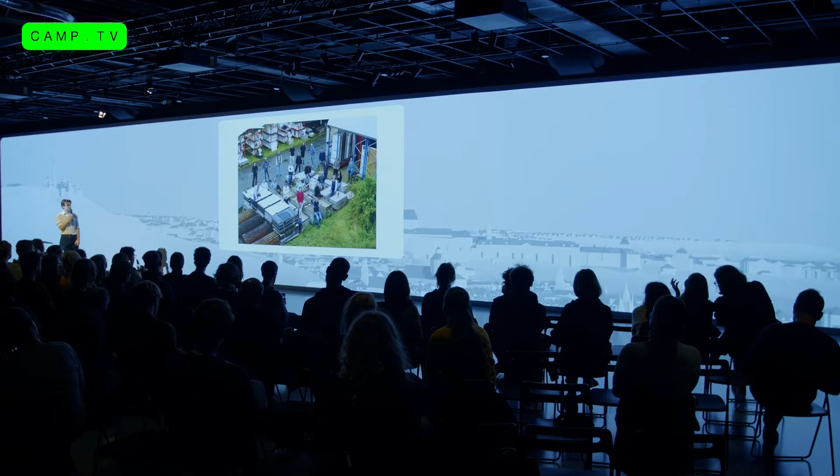So we're about 20 people on the side of Rotor Deconstruction and 13 people on the side of the non-profit. We are sharing a site, we are colleagues, but we're also two very distinct organizations, and we will talk about some of the activities of both organizations.

Actually, we're very thankful to be invited to this building because it's an excellent case to introduce our talk. We've had a very nice tour of the building. We learned it was built by Karel Prager, who seems to be one of the most prolific architects in Prague in the 60s, 70s, and 80s. And we also learned that after its construction, a couple of prolific architects had their studios here. So it seems quite an extraordinary place to have a center for architecture.

But actually, I want to talk about this type of building because it's clearly a local iteration of a type of building that most people in Europe will know, namely a 1960s, 70s celebration of steel, glass, concrete, and probably also aluminium in this case. Materials which you could consider as products of fossil fuel abundance. And an architecture that also very much celebrated these, at the time, modern materials as a way forward, as the announcing of a future.

Now, if you see buildings like these in urban centers, particularly of old European cities, it's probably worth asking yourself what buildings have had to make way for it, right? Because with this architecture, which carries a very optimistic view of the future, often came a very strong disavowal of the past, or maybe just simply a disinterest in the past. So I think in this case, a couple of apartment buildings have had to make way, but the apartment buildings here are quite big, so it might have been an entire city block, I'm not sure.

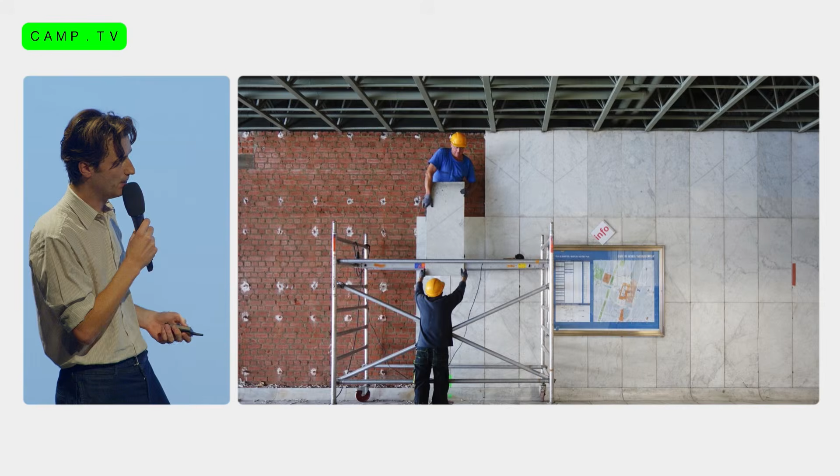Now, if your building was designed by a good architect, a famous architect, chances are you have some nice, high-quality finishings. This is a picture of a bank building where Rotor Deconstruction dismantled a lot of materials in the very early days, where they also dismantled a lowered ceiling, which had quite a high resale value. I've seen very nice materials in this building as well, some very nice doors, door handles, nice staircases, nice architectural details. Maybe your building will have a couple of intrinsically highly valuable materials, such as natural stone. I've seen those here as well.

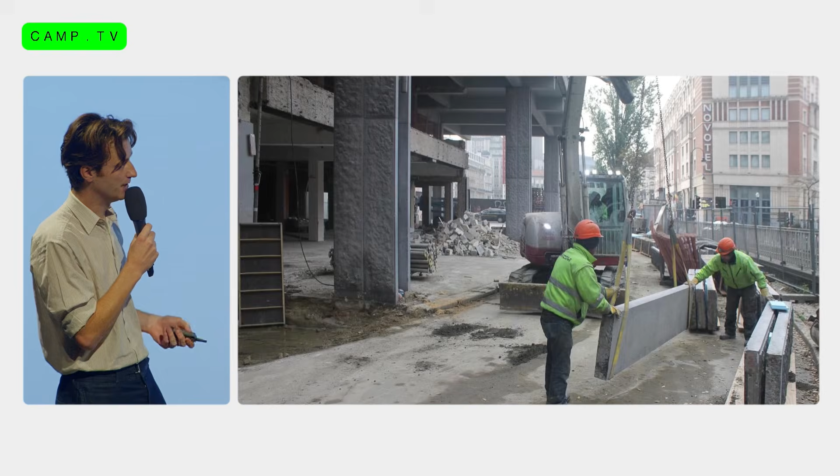Stone that was used as wall cladding or facade cladding, and which are just inherently durable materials. You can recut them, rework them, and if you're lucky, you might also get your hands on a couple of types of stones or exotic stones or exotic woods that you would not find anywhere else if it wasn't in these older buildings.

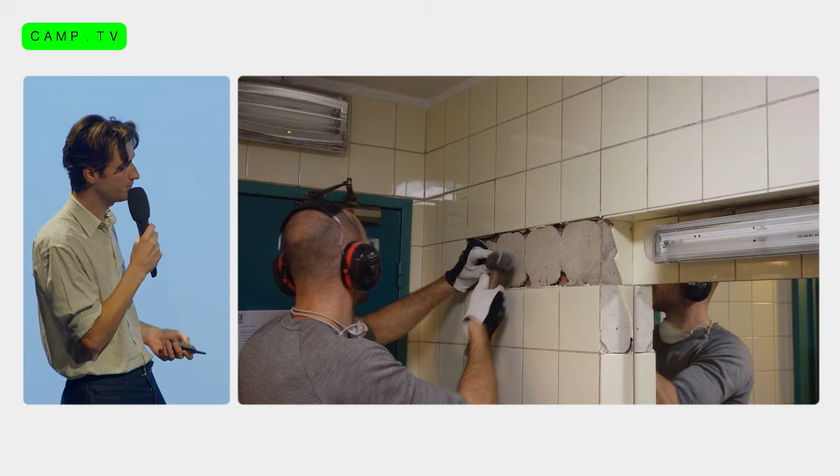Then if you've run through the, let's say, the best sellers, the materials for which people might want to pay, you get to maybe a bit lower value materials, which might be interesting nonetheless. Maybe the building was fitted recently with some LED lighting or other technical installations. There are definitely some here, which might be useful for the renovation or someone else in another project. Or maybe some other more banal, but nonetheless very durable and reusable materials, such as ceramic wall tiles from the 60s and 70s, which will generally dismantle quite easily.

And if you're really not too sure what to do with your materials and you don't think anyone outside of this project might be interested, you can always organize a giveaway. If you give materials away for free, people will come and pick them up. We can assure you. But then, when you run through the bestsellers, you will actually notice that even on the level of finishing materials, a lot of materials will actually not be fit for reuse, and there can be 101 different reasons for that.

It could be because they are too fiddly to dismantle, because they are toxic. There are 101 different applications for asbestos. You will always be surprised. Maybe because the materials don't comply to certain contemporary standards or norms, etc. So actually quite big flows of materials will end up being treated as waste anyway.

And then you might say, well, a proportion of those materials might be recycled. That's true, probably. But we know, and it's not something that we proclaim, but this is something that is generally accepted, that recycling will not conserve actually much of the value that is in an element. You are losing the energy that was invested in creating the element. You are losing the cultural and historical value of an element through this process of recycling, which also takes a lot of energy.

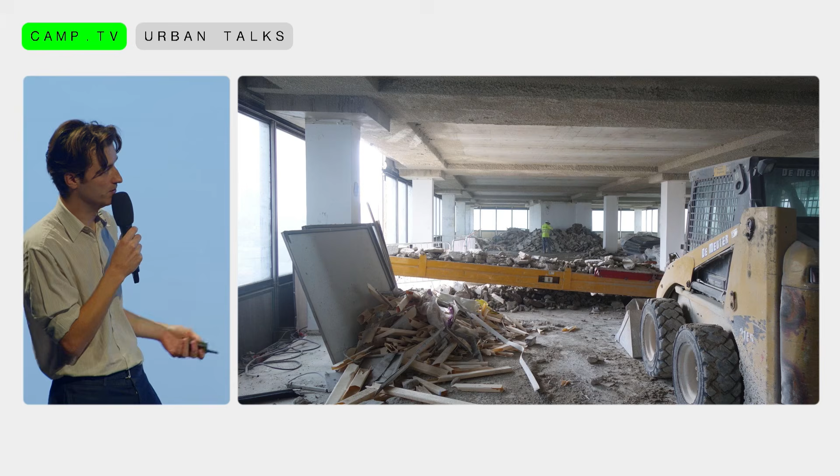And then when you're done with the finishing materials, the real volumes of materials start moving, even in a renovation project, because you might find that in a 1970s office building, your floor-to-ceiling heights are not really up to contemporary standards, are not high enough to fit all your technical installations, and you might want to get rid of your screeds, which will create thousands of tons of concrete rubble. You might also want to get rid of interior partition walls in masonry.

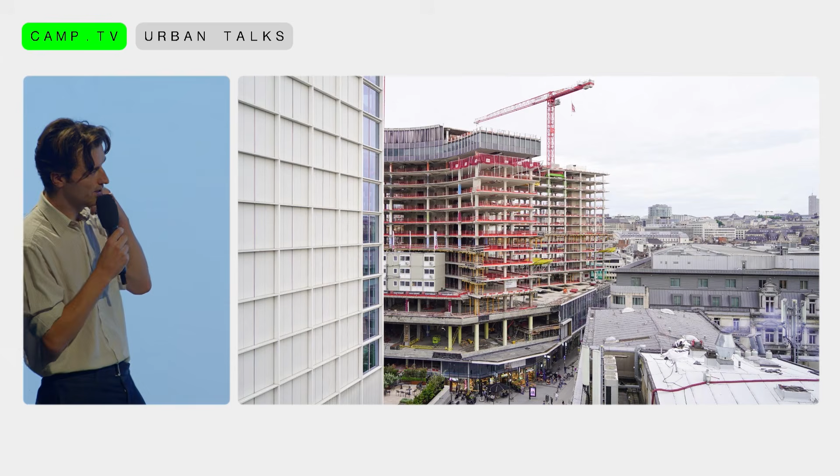And then, of course, the facade will have to go as well, because these facades from the 1970s don't perform as well in terms of conserving the energy to heat and cool the building. And in many cases, if your building doesn't have a particularly patrimonial interest, the owner will like to have a new face to the building by reconstructing the facade. So actually, if you zoom out, you will see that even in a renovation project where you conserve large parts of the structure, large volumes of materials will move and will end up as waste.

Nonetheless, the owner of the project might promote the building or the project as a circular pioneer because of those few reuse operations we did, which were significant, so it's not unjustified that we can call these circular actions, but they might be blown up a bit. You might call this a form of circularity washing or greenwashing. And before you know it, our logo will kind of feature as a stamp of approval between other well-known sustainability labels. So there's kind of a discrepancy here between a discourse within rooms like these on circular construction and the amounts of materials that are actually moving, even in renovation projects.

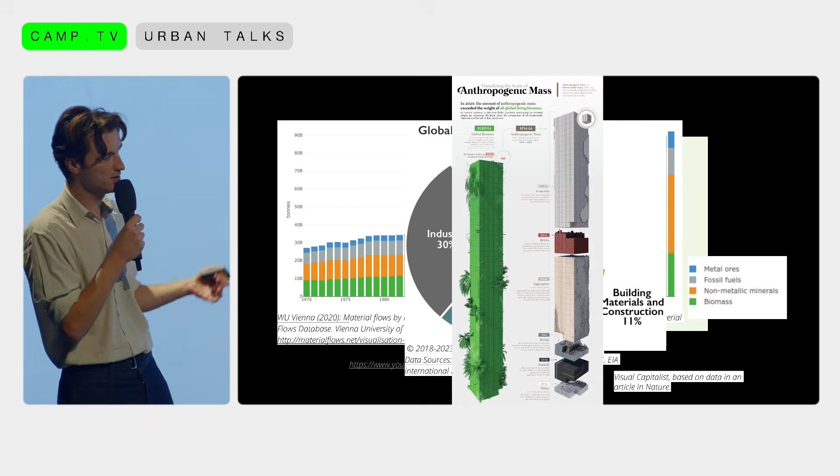And this, of course, is happening on a much larger scale as well, as I'm sure you're aware. We are producing more and more demolition and construction waste every year, while we are extracting more and more raw materials every year, a large part of which for the production of concrete, sand, and gravel and stone to produce cement. Up until the point where we actually produce more man-made materials on this planet in terms of weight than there is living biomass. And of course, the final boss of these statistics, the proportion of CO2 emissions that the construction sector represents globally, which is up to 40% now. I'm sure most of you are probably now aware of the ideas that these statistics represent, and maybe some of you already know them by heart.

Swyngedouw talks about, of course, society as a whole, not particularly the construction sector. Then he says, managing emissions becomes the stand-in for something else that's considered too big, too unwieldy, too unknown, too frightening, and or too unattainable. So somehow we are left with this reality of being stuck in a linear economy of extraction and exploitation, and on the other hand, actually a realization of all these frightening statistics and this reality, and we don't really seem to be able to do anything about it.

What we will try to do tonight is, we're not going to sell you a worldview or a big solution, but point to maybe a couple of themes that today are maybe under-discussed when we talk about circularity, and that might address some of these too unknown, too frightening, or too unattainable factors. Maybe that point to certain discussions that are maybe too hard and that we are actually maybe avoiding today.

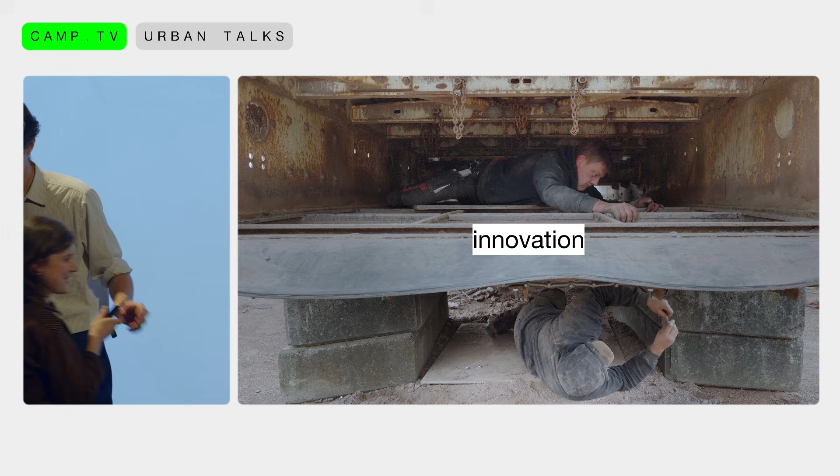So one of those underexposed topics is the link between circular construction and innovation. And closely connected to that, something we will talk about later is the role of manual labor in these practices. So if you saw the films of Beka Lemoine before this talk, you will probably have noticed how much these topics are present in their work as well. And those are topics that are also very present in our own practice.

So these days, a lot of funding goes into circular construction. They very much tie circularity to innovation. And most of the time, innovation means digital innovation. So those two ideas got very closely linked, especially through projects like the European Green Deal, etc. But this link is for us not exactly obvious.

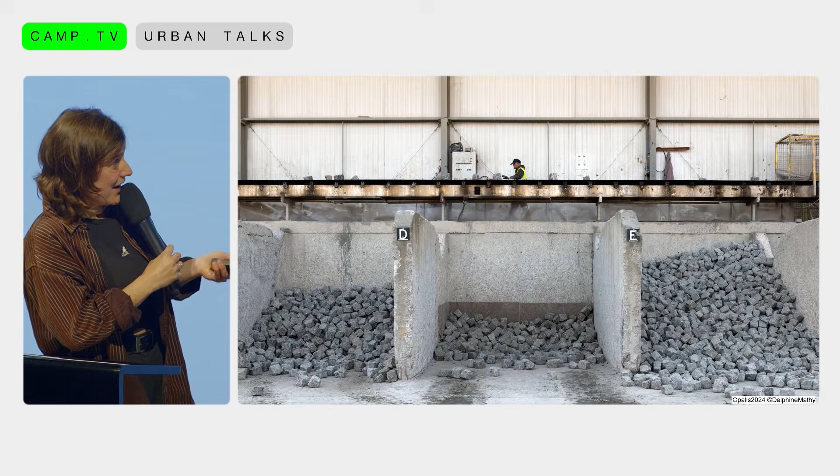So these are other examples of other yards: doors, steel, wood decks of boats, terracotta, roof tiles. But many of them also treat materials, sorting them, for example. In this case, this is a cobblestone dealer that sorts the cobblestone by size or type. In that case, it's clinkers, which are ceramic paving tiles, which is an extremely durable material.

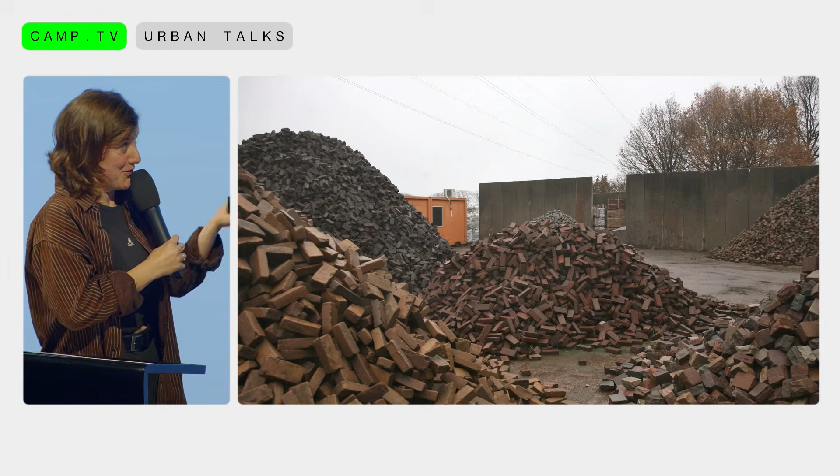Research shows that the average age of such a clinker is 125 years, so that's quite a lot for a material, and it could be reclaimed a lot of times. But many of these operations still require a lot of manual labor, like the process of brick cleaning. So reuse in that sense is a bit messy. Many used materials are irregular sizes or they need specific attention. And often only the human eye can really judge if the material is reusable or not.

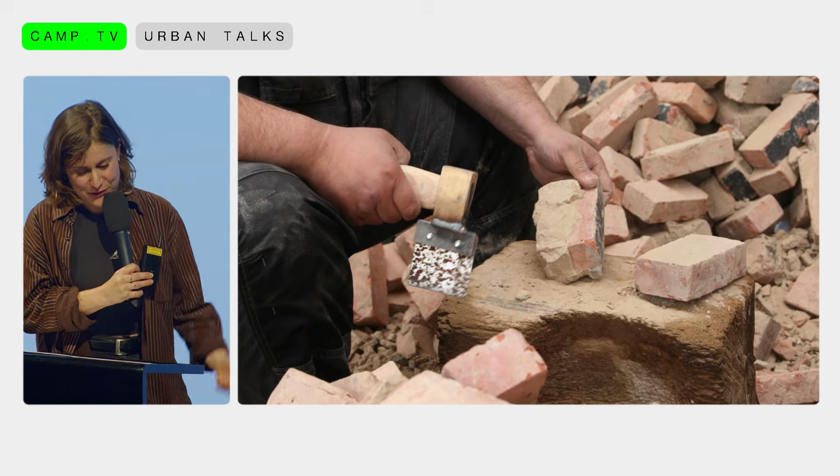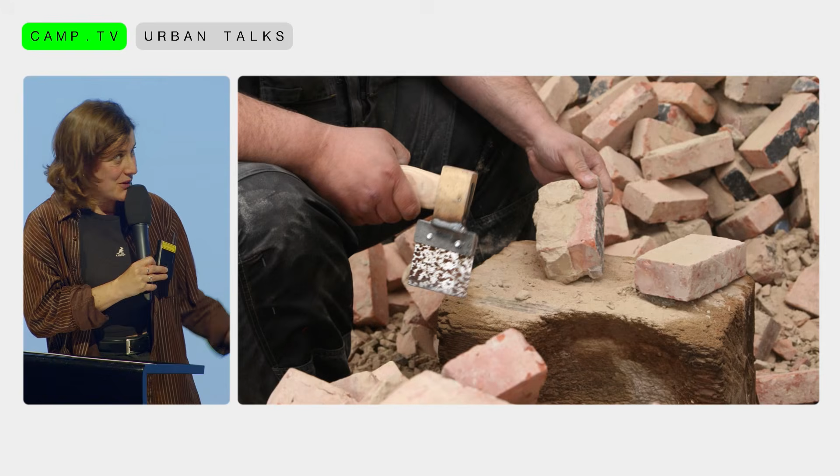Just a side note on this, a good brick cleaner can actually clean 1,000 bricks a day. So that means a large pallet you just saw before. And we have found some documents dating back a couple of centuries that mention more or less the same amount. So it's really a profession that never really changed and that kept doing its thing until now.

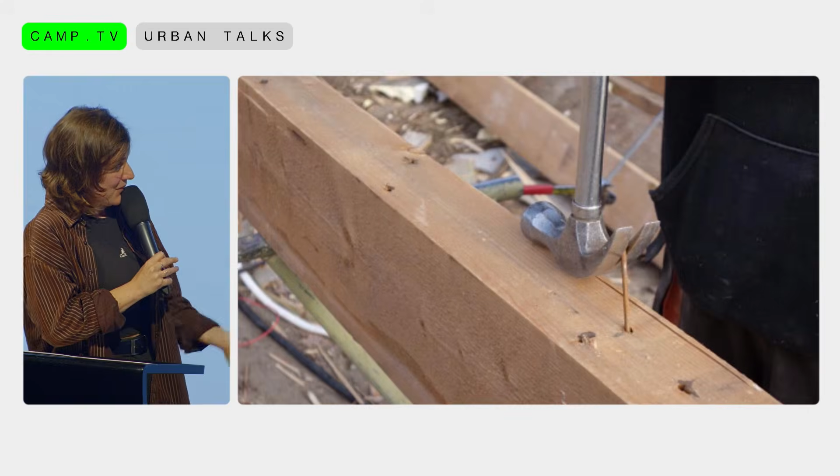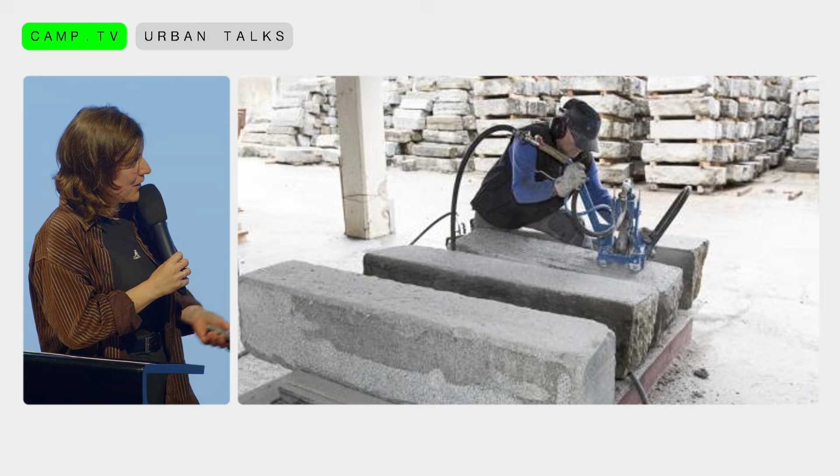Denailing, also a form of treatment. You don't want customers to break their blades when they cut your reused wood. This is surface treatment. In this case, it's stone, but you could also imagine treating wood, cleaning ceramics, repainting radiators, etc.

This is a cobblestone you just saw before. It's cut in two. It's actually quite an intelligent innovation, I would say, of one of a few cobblestone dealers: by cutting them in two, you get two surfaces. And you also make the cobblestones from the street meet new standards.

For example, they are more friendly for wheelchairs, buggies, bicycles, etc. So one side is flat, and you can still use the smaller part on the opposite side, and then you have the patina of decades of road traffic. So you actually double the range of your product. We kind of like this story. So this is where Rotor DC enters the picture.

The research on Opalis showed what already existed, but also what lacked, namely a local urban actor interested in more contemporary materials. So that is how the activities of Rotor DC took off. We noticed this lack, but also the necessity to be implicated ourselves in the reality of construction. After having done mostly research and exhibitions, we wanted to jump into reality.

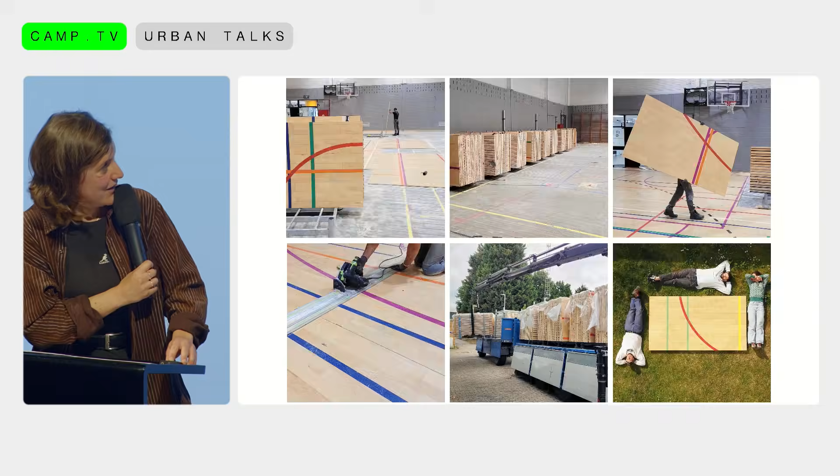And talking about large quantities, sometimes we get quite surprising batches that are very large quantities. Like what you see here is a radiator cover, which was widely used in office buildings from the 70s in Brussels. Buildings that at this moment, many of them are being refurbished. So we got a lot of these panels the last years. It's a very specific product. It's round, like you cannot find it like this on the market. It's also very durable. It's very good multiplex.

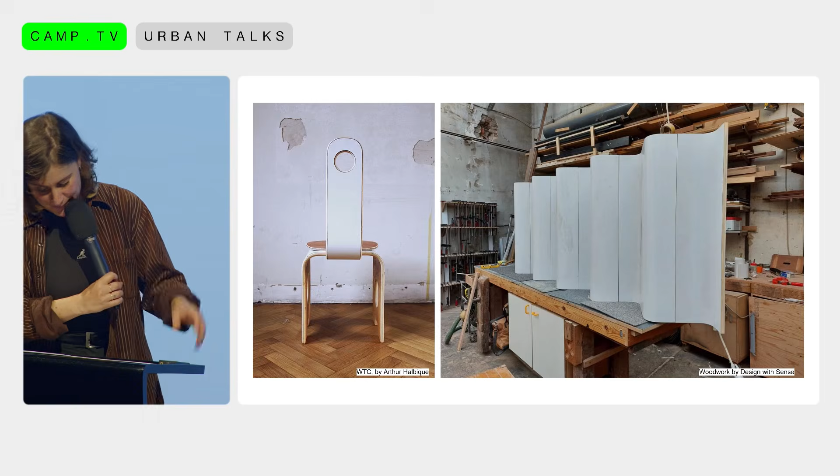And it's something designers got really excited about. So at one point, they were kind of popping up everywhere in Brussels. We were also not the only ones getting our hands on one of those towers, so they were circulating in Brussels. So it was really a big mine, you could say.

And somehow this specific panel marked a period in Brussels, at a very local level. But the beginning of the 2020s was really marked by this curved panel used everywhere in temporary locations, etc. And I've been hearing some designers and people just being really bored of this material and not being able to see them anymore.

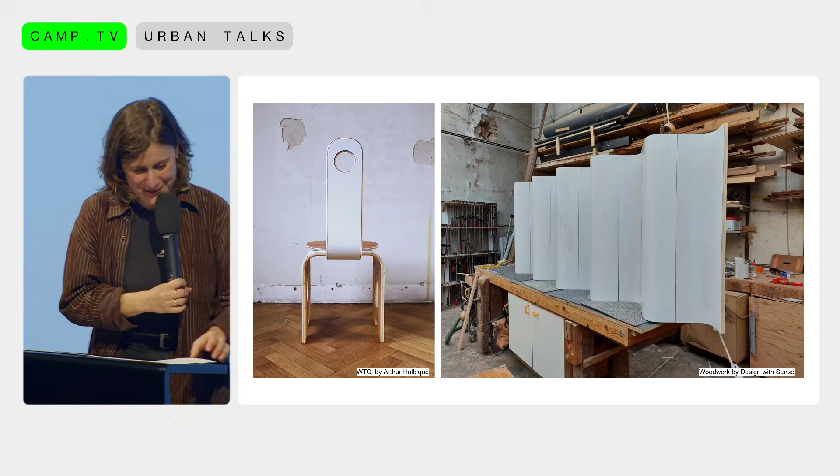But by not doing the dismantling ourselves all the time, we can also focus on steps that are just as essential for reuse, but which require a very specific know-how, such as cleaning and reconditioning certain materials. Take the toilets, for example. So I think Tom showed the building before, Multi. So imagine this tower, like 20, 30 floors high, with at least 4 toilets on every floor. So that's a huge number of toilets you can take out of just one building with one renovation.

So toilets are not the easiest material to put back on the market. Cultural perception plays a role. And also, to be honest, it's just not very exciting to reuse a second-hand toilet. But anyway, we tried to make this work. So we applied for funding to experiment on deep cleaning these toilets, and a way to remove the lime scale inside of the ceramic toilet.

You see here, this is a specific workshop line we developed at one point, where you plunge the ceramic toilet into acid for a few days, and then it just takes off everything, and it comes out almost as new. We realized it was too much work in the end to make it cheaper than a new toilet, so we stopped. But we still use this technique for other ceramic products like tiles, etc.

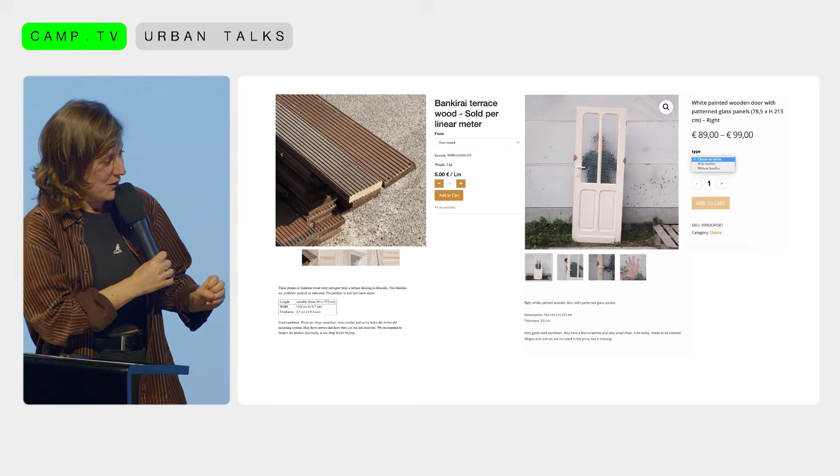So as a conclusion for this part, managing a stock of materials basically doesn't require way more than a dedicated space, a motivated staff, fairly standard stock management tools, and basic transport. All of this already exists or can be tweaked a little bit to adapt it to the specific needs, but there is nothing really high-tech involved in what we do at Rotor DC, at least.

So a second blind spot in today's circular economy debates is the role of manual labor, and yet it's absolutely central. Most circular activities, especially reuse, depend on it. Salvaging materials, preparing them for a second life, cleaning, repairing, it's really not suited for automation.

So then you have to sort them. At one point, you have to reimagine categories to sort them, because not all the categories fit with other materials. So it's every time reinventing the thing, but it was completely worth it because we knew a lot of slabs were going to come.

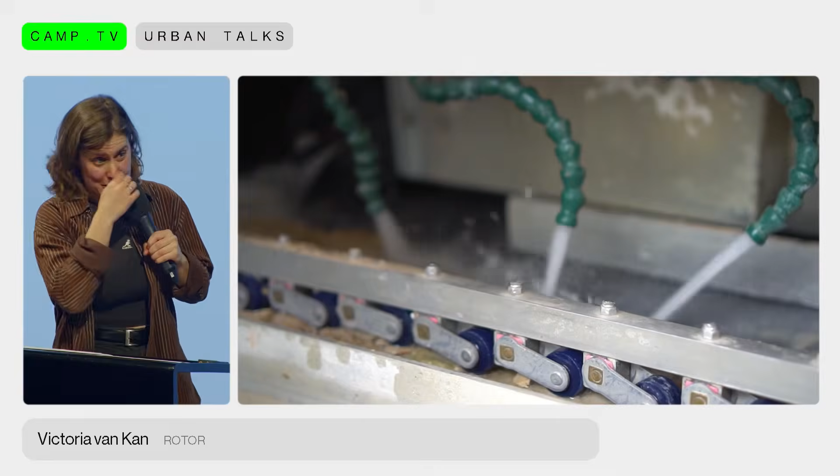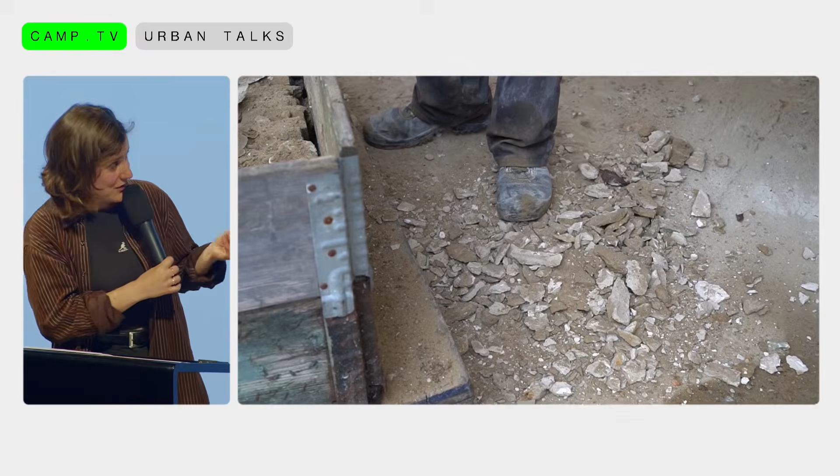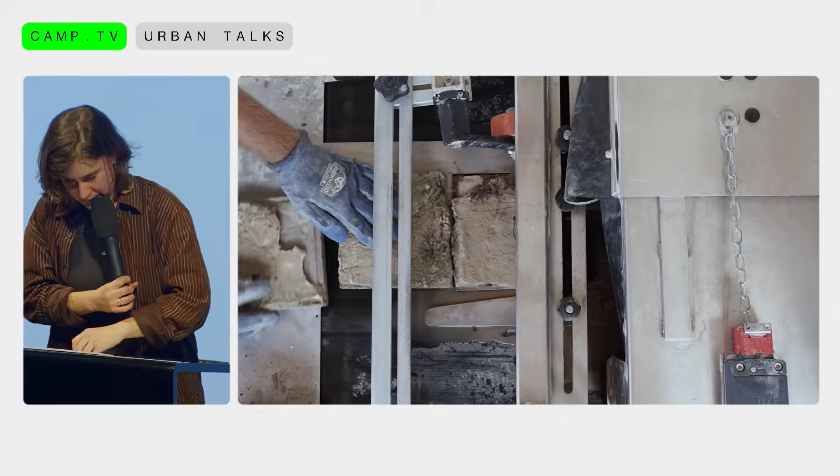This is another workshop at Rotor DC. It's the tile cleaning machine you will see later in the video. When we dismantle ceramic tiles, there is a thick layer of mortar stuck on the back. What this machine does is cut off this mortar on the back of the tile. We used to do this by hand with a chisel and a hammer, but the result was a lot of broken tiles, and often the cement is harder than the tile itself. So the result was not great.

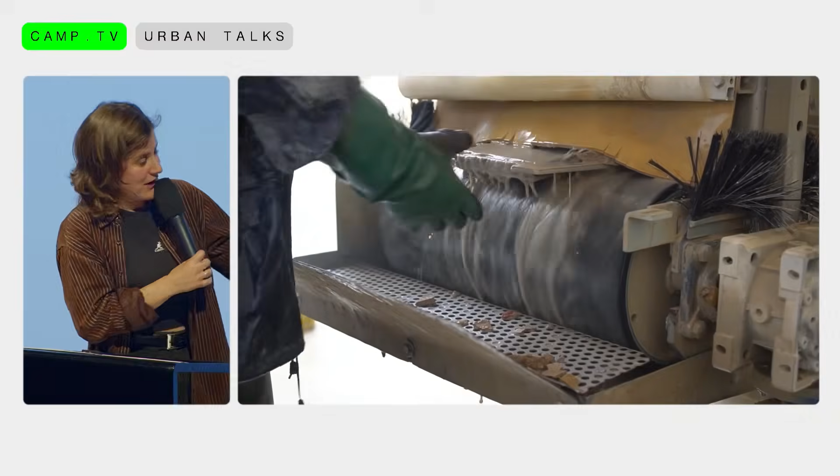The other technique would be plunging them in acid, just like the toilets, which requires, by the way, less manual work. But this only works for ceramics. These tiles you see here are cement, and of course they would just melt along with the cement crusts on them. So as we had many tiles waiting which were not ceramic, and we knew many more would come, we considered investing in semi-mechanized equipment. It's a bit the first time we do this.

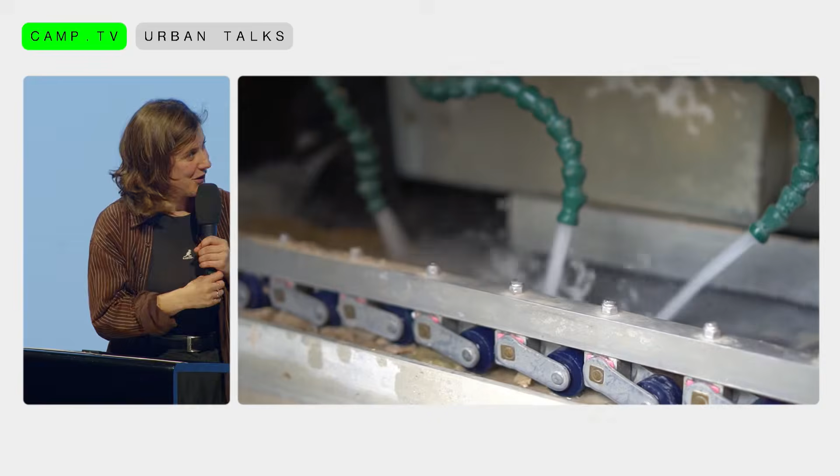We hired an engineer who could help us develop this machine to process more tiles at a quicker tempo. It was not a machine imagined from scratch. We just tweaked an existing machine to our needs, but with this machine we still have questions about what kind of job we created.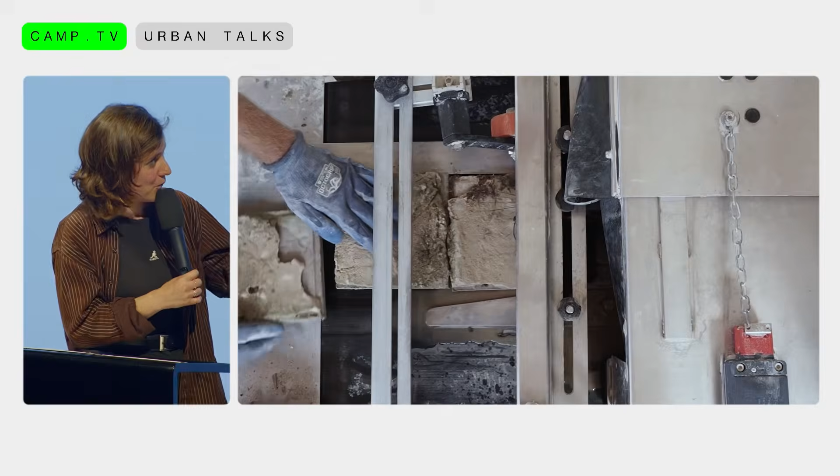It's a lot of noise, you cannot hear it now, but if I put it on, it's really unbearable. We have to wear a lot of ear protection to be able to work there. It's very wet, very muddy. You cannot do it in the winter. You always need someone skilled close to the machine, because a lot of things can go wrong. The blades react differently to different types of tiles.

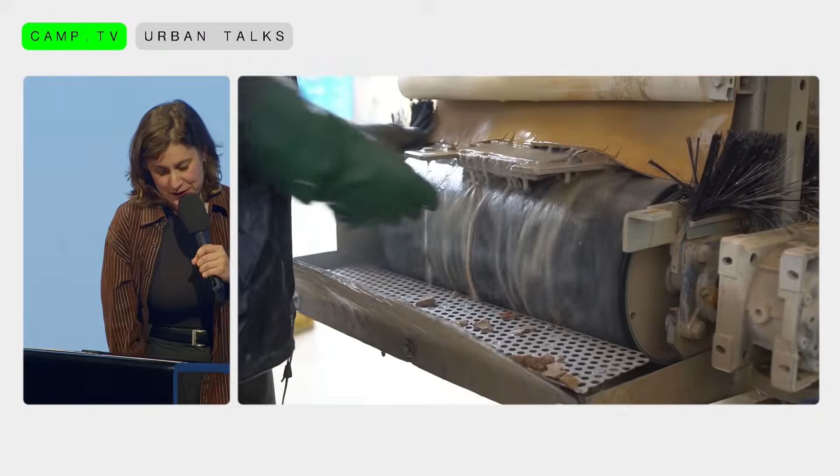So yeah, this is also why the calls to scale up, which I was talking about before, often miss the point. Reuse is very diverse and unpredictable, as I said, and that's a big difference from how the capitalist economy works in general.

Yeah, reuse is a very local thing as well. It involves labor, and in an economy that struggles to recognize the value of labor, both economically and symbolically, this poses a serious obstacle to reuse.

And so far, the reuse economy, at least in its formal forms, has managed to develop new market niches for white-collar professionals. And compared to that, we see way less initiatives busy with really salvaging materials.

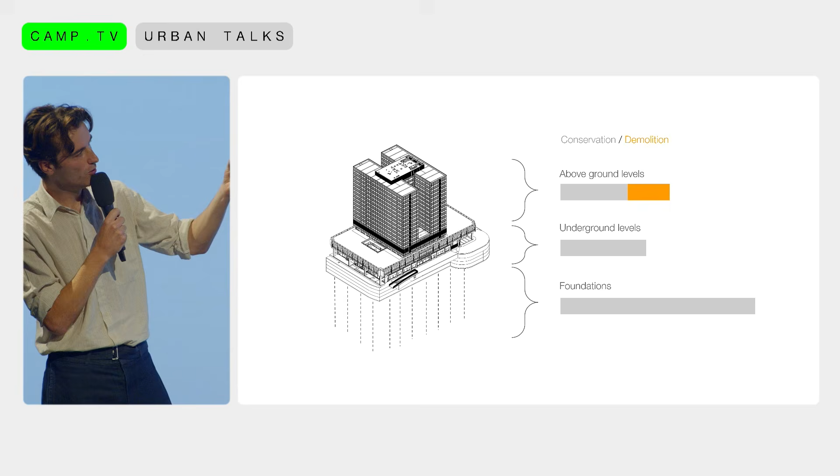And this graph shows you the sheer amount of materials that were prevented from going to waste by maintaining the structure only, right? So the facade went, the finishings went, etc. But we kept the primary structure of the building, and you can see that most of the weight of the building is underground. It's the concrete parking floors and the foundations that had to go really deep because Brussels is very swampy. And you can see that only a small proportion, the orange bar, of materials have had to leave the building. So these were the facade and the finishing materials.

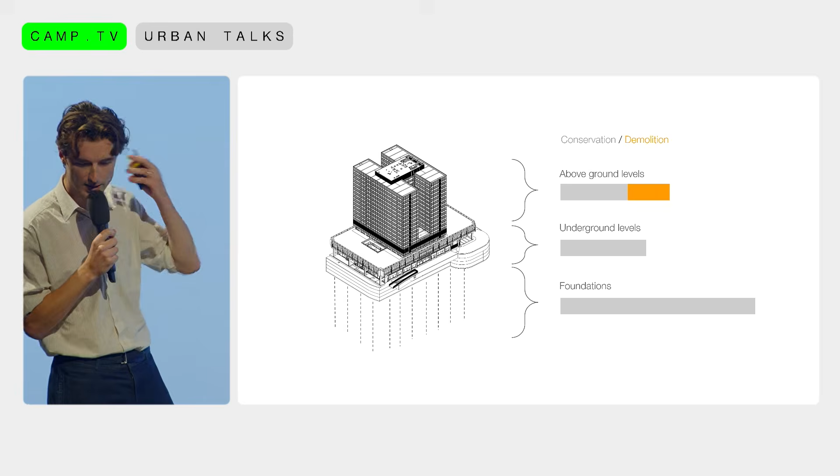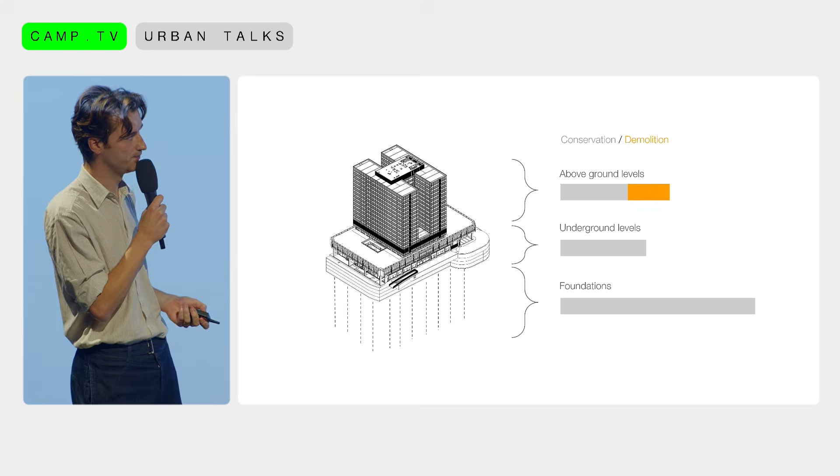Now, of course, the weight of these materials is not directly correlated to their environmental impact, but you can imagine that these amounts of steel and concrete do represent a significant portion of the environmental impact, the embedded CO2 and the embedded energy in these materials. We were called upon to assist on reuse specifically, so it was the developer's decision, pushed by public officials and policymakers, to maintain the structure.

And one of the more practical merits of maintaining the building, besides avoiding all this waste, is that if we were then looking for reuse, we didn't have to bother sourcing reclaimed structural elements. As I'm sure you can imagine, structural elements are trickier to reuse in terms of liability, in terms of logistics. It's literally the backbone of your building, so you don't want too many uncertainties when it comes to the structure. So it actually made reuse easier, and it allowed us to focus mainly on finishing materials and technical installations.

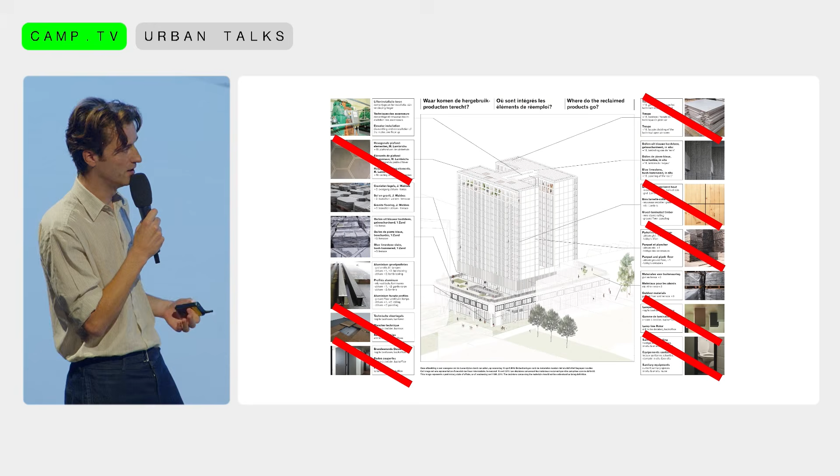And this is an overview of the materials that we proposed, and as the image suggests, quite a few of them didn't make the final cut because they might have been too expensive, they might not have complied with certain norms, or it might have been a material the contractor wasn't really comfortable working with.

And I will just quickly show you 3 operations that were successful, all 3 of which revolve around the reuse of natural stone. And I wanted to highlight this to talk about the challenges that come with reusing materials on a certain scale. If you're sourcing materials for a building of this size, I think it was around 40,000 square meters of renovated surface area, you really don't have too many options of materials that can satisfy such a need.

And one of the materials we were able to source was a Belgian blue stone from a large square in Bruges, of which there was 6,000 square meters, so we only used a fraction of that for the entrance lobby. And then, of course, another potential source for materials might be very similar office buildings.

This is a natural stone that we sourced from an office tower in Paris, and that we used as a floor for the terrace. And finally, a material that was sourced by Rotor Deconstruction that was dismantled in one of their early demolition or dismantling works from a 1970s bank building. It's a grey granite stone.

Now, all 3 of these operations wouldn't have been possible if it weren't for the network of salvage dealers that Victoria showed earlier that you can find on Opalis. So professionals who take the risk for us to decide to dismantle a material, to sort them, to clean them, and to offer them at a stable price.

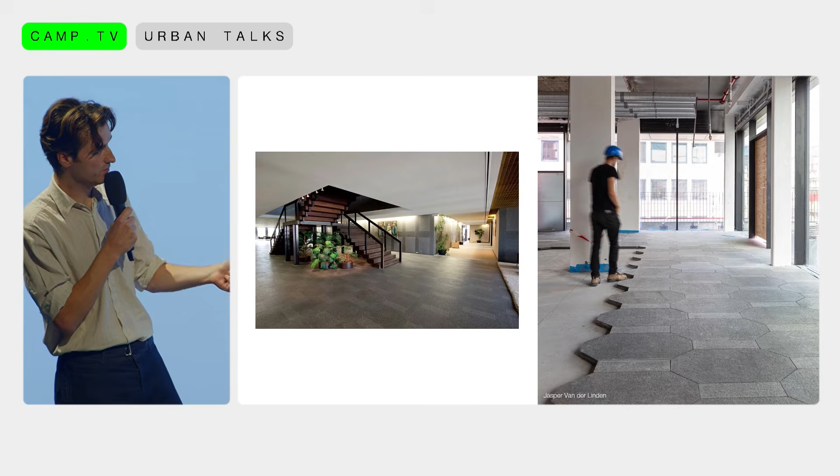This is just to introduce this evolution towards a different stance on the demolition of modernist architecture. The stone you see here was dismantled from the building on the left, a Brutalist bank building from the 1970s with extremely nice interior finishings, which got entirely demolished in 2014, unfortunately. And only 4 years later, planning started on the Multi project.

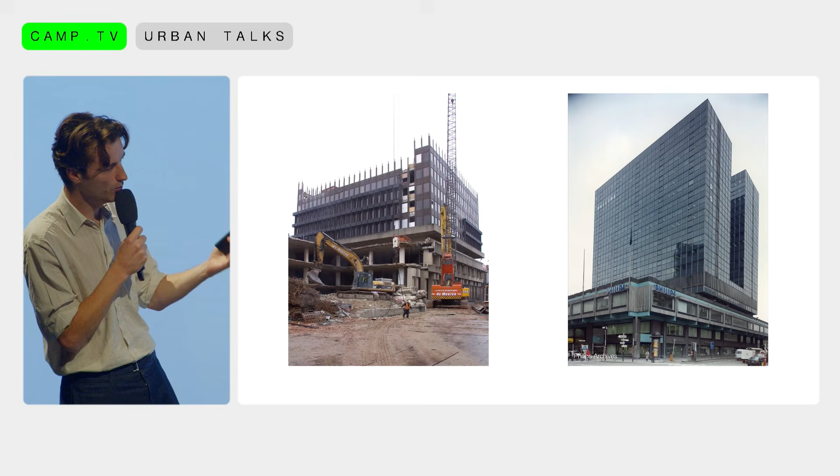And here, the attitude already shifted a bit. So it was decided to not only maintain the building, but also maintain certain of its modernist architectural qualities, specifically the podium that was clad in bluestone. The facade obviously has changed quite radically, as you've seen.

And this shift in attitude has actually resulted in quite a progressive piece of legislation, which was passed last year by the Brussels government. It's the new regional urban planning regulation, which basically sets out the general rules for building and renovating in Brussels. And the first line of Article 4 reads, "Every existing building shall be maintained and, if necessary, renovated."

So basically, if you want to demolish your building in Brussels now, you have to motivate that decision. It cannot be the result of just a simple calculation: yeah, well, financially it's more interesting to demolish, so we'll do so. No, you have to motivate that decision, proving that it is either beneficial to the environmental impact of the project, that it is beneficial to the surrounding area, etc.

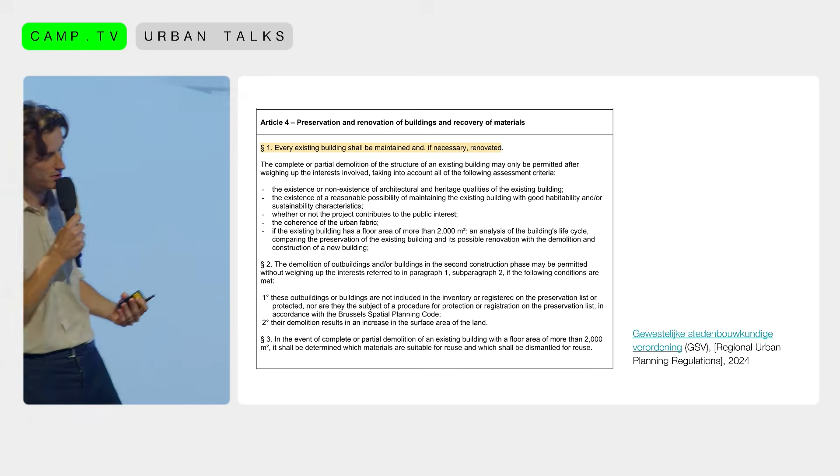Now, this is a very interesting piece of legislation, and we really applaud it, and it's really the result of the work of a lot of policymakers, public officials, and also some developers and architects that showed good examples. But we also have some questions about the effectiveness of such legislation, because these design assistance projects, of which I just showed one example, have provided us with front row seats in Brussels' development world.

And actually, we've been witnessing some tactics that developers employ to kind of circle around the idea of this legislation. Because the idea is, of course, to maintain structures of buildings, to avoid the consumption of materials such as concrete and steel to erect them. And one of those tactics that we've noticed is the very drastic shortening of renovation cycles.

So this is a building from 2008, for which Rotor was invited 2 years ago to already think about possibilities for reuse in the new project. So only 15 years after the erection of this high-quality office building. It had high-performance double glazing, heat recovery system, LED lighting, solar panels, you name it, it had it. But already it was up for renovation.

So it's quite clear in this case, at least to us, that these works are not really satisfying an inherent need. They are not fixing an inherent problem with this building. What it does is it reintegrates the building into the market. And we ask ourselves, well, okay, demolition versus refurbishment is quite a clear-cut yes or no. But how would you legislate too soon of a renovation, too short of a renovation cycle?

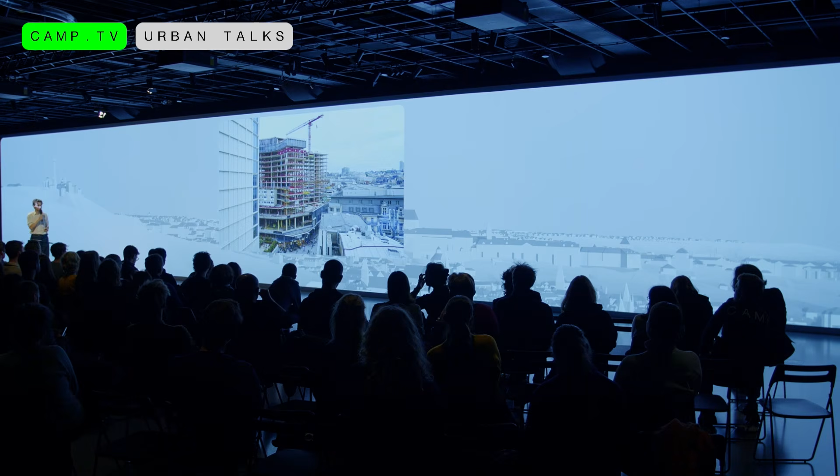Another tactic of dealing with this ban on demolition has been densification. This is a project, again, a 1970s office building, of which I showed you some pictures already in the very beginning of the talk. I think a surface of about 65,000 square meters that is being renovated.

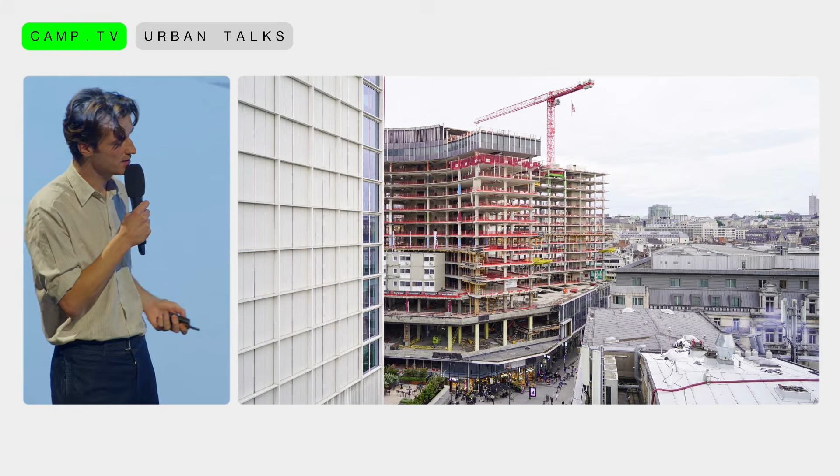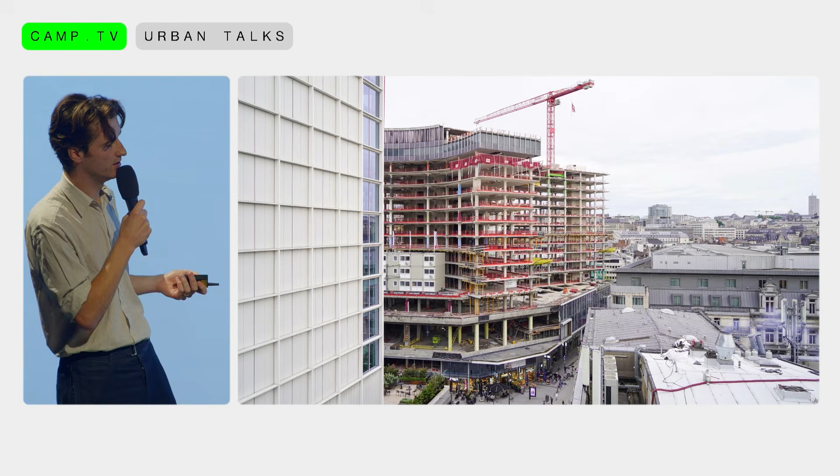You know, in a world where there is a ban on demolition, there's actually quite a cheap bargaining chip for it. The land in cities itself is quite scarce, so it's really hard to negotiate that. But actually, in that context, the sky is relatively cheap. So quite literally, the urban planning regulations that make it harder to demolish actually make it easier to extend buildings upwards. And this is a project where exactly such a thing has happened.

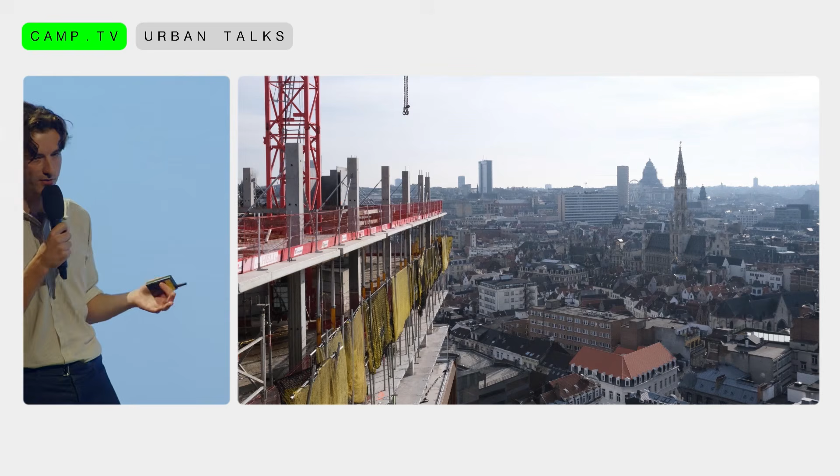So we're talking about an enormous building already, and yet for it to be a financially viable project in terms of the renovation, it had to be extended by about 10% of the existing surface area, which doesn't seem like a lot, but 10% of this building is 6,500 square meters. So basically you have to build a medium-sized building to make it possible to renovate a bigger one.

We've actually done the calculation of the materials that will be consumed by this project. So we've measured all the materials in the bill of quantities of the architect. So this excludes the existing structure. It's only incoming materials. And so even in a careful renovation project, this is the proportion of concrete in that material. Again, this is weight, this is not environmental impact, but nonetheless, almost 3/4 of the materials are concrete for the slabs, for the extension upwards, for the screeds, and for the masonry.

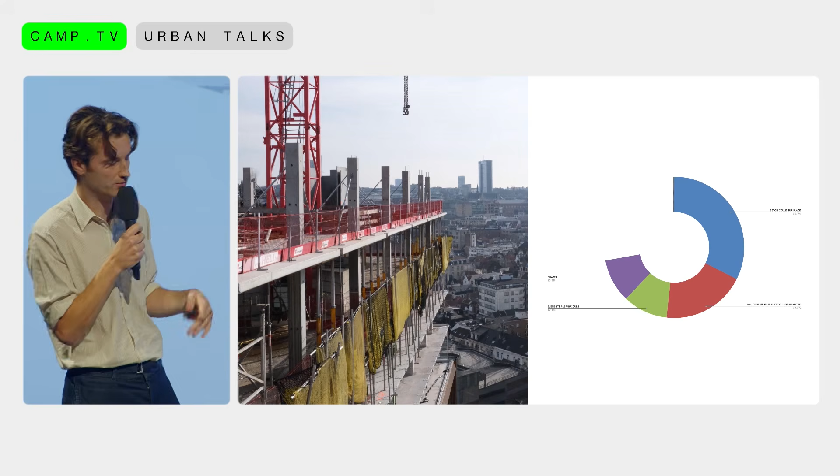So even though in relative numbers we are talking about a frugal project, we are maintaining the building, in absolute numbers we are still consuming 30,000 tons of new materials, of which a big proportion is concrete. So where the other examples maybe show a drive for the new, this project quite clearly shows an imperative of growth. You can only build bigger to maintain what you already have.

Now, this is not really to criticize the legislation or to say that it has no use. Maybe we can think of ways to improve it. We can look to Vienna, where a very similar ban on demolition exists, specifically for pre-World War II buildings. And there they actually accompany the legislation with active audits by the city administration on the proper maintenance of the building. So they check if you're actually maintaining your building so that you can't go, well, it's in terrible shape, I have to demolish it now. No, you also have to maintain it.

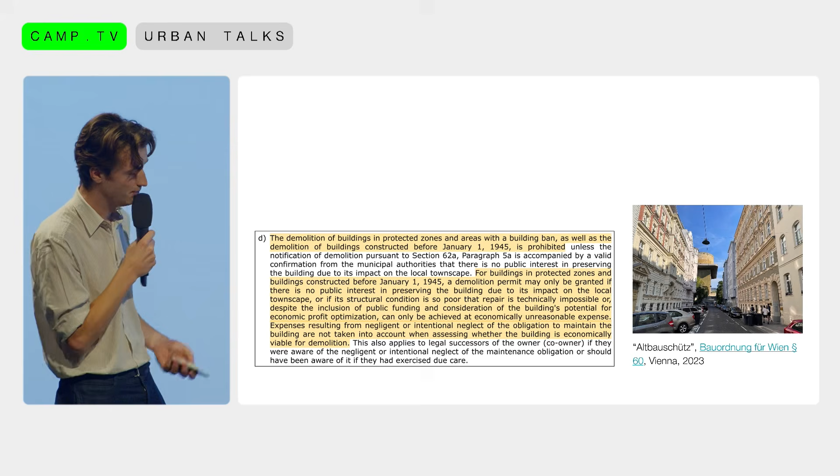We can also look to Portland, a city in the United States, where they protected not buildings, but specific materials. So specifically, again, older buildings, if you want to demolish them, you are obliged to reclaim certain elements, not necessarily for reuse in the project, it can also be elsewhere. And if you don't reclaim them, you have to motivate that decision. You are obliged to work with certified demolition contractors who are skilled to dismantle them, and you have to contact salvage dealers to reclaim the materials.

But somehow it's clear that legislation maybe isn't, or not in this form at least, the best way to address material consumption. Clearly there are some dynamics at play that kind of escape the logic. Or at least, and this is what we try to show tonight, if that legislation is incessantly focused on materials alone. The goal of the topics we address tonight is to show that our building culture isn't only founded on the materials we use or the CO2 those materials represent, but also certain social and economic relations that are a bit trickier to address and that we maybe avoid a bit too easily.

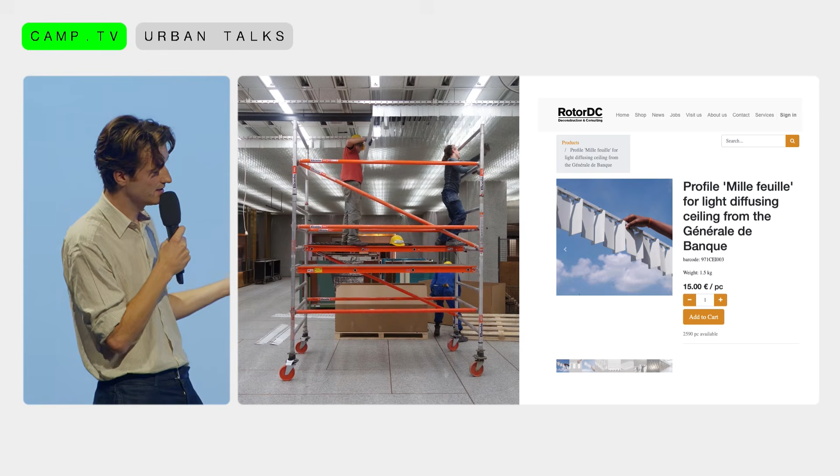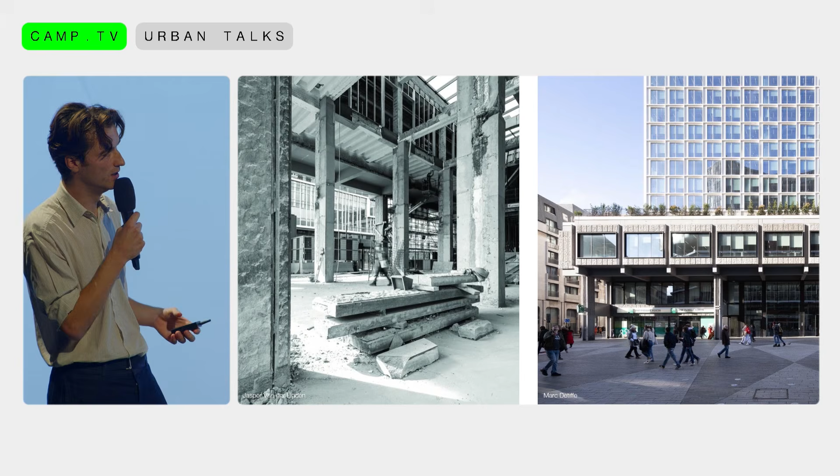So this circular action or tradition can not only exist next to this linear logic, but can even rely on it. And even though we have had some successful reuse operations by working with architects and developers, the sheer discrepancy of scale is quite humbling as well. Multi consumed the equivalent of about 25 times the yearly turnover of Rotor Deconstruction in terms of weight. We cannot really ignore the fact that we will never be able to satisfy this scale of need for new materials. At the same time, it also consumed about half of the yearly turnover of Rotor Deconstruction in terms of reusing materials, which is also significant.

And so I think the talk of tonight is really a plea to continue addressing the two together, to put things into perspective, to at once acknowledge that we are very much addicted to a linear logic of exploitation and extraction, but that at the same time we can also value these circular actions and see them as a potential way out without being blinded by it. That's something I think typifies our practice and that we think is necessary to keep a productive conversation on circularity going. And I will leave it there.